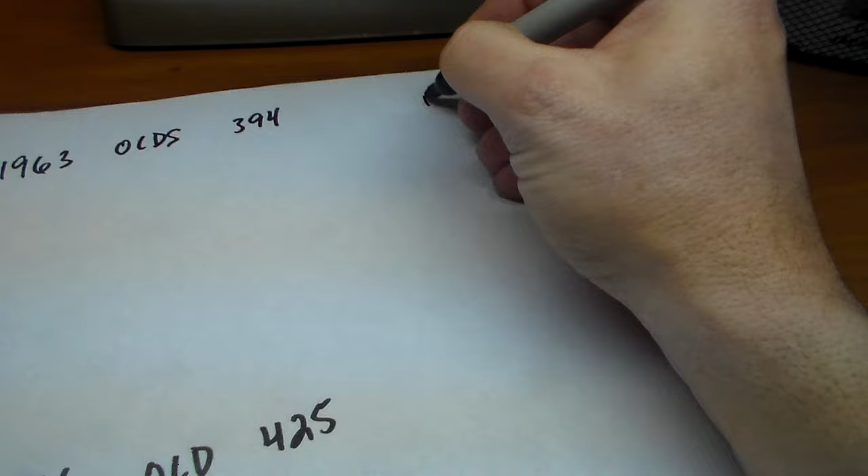And then down below we're going to do the second one: a 1966 Olds 425. And we'll say both of these are in a B body—that's what that car is. A C body is like a 98, like an Olds 98. That one's an 88, an Olds 88.

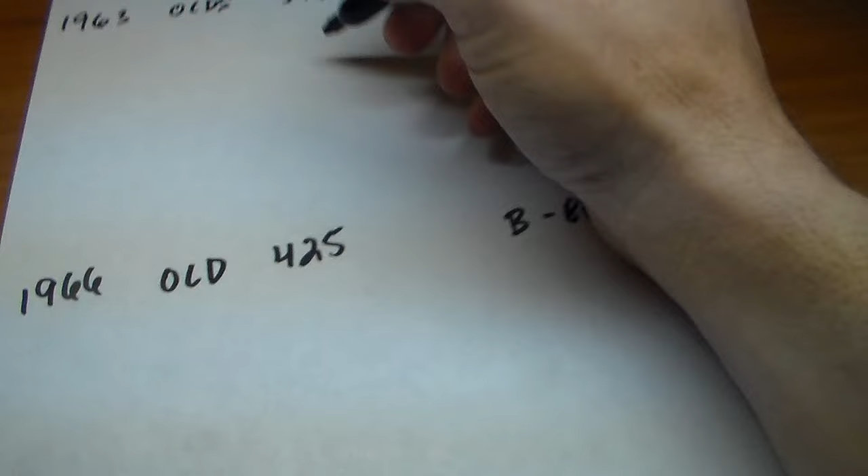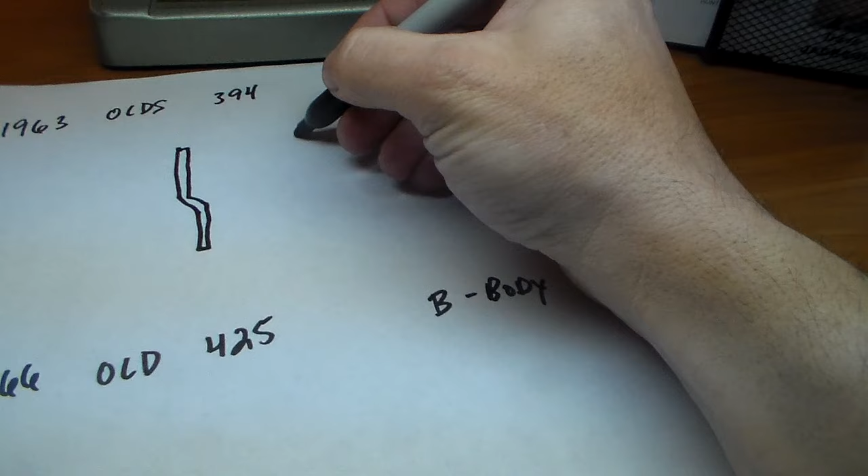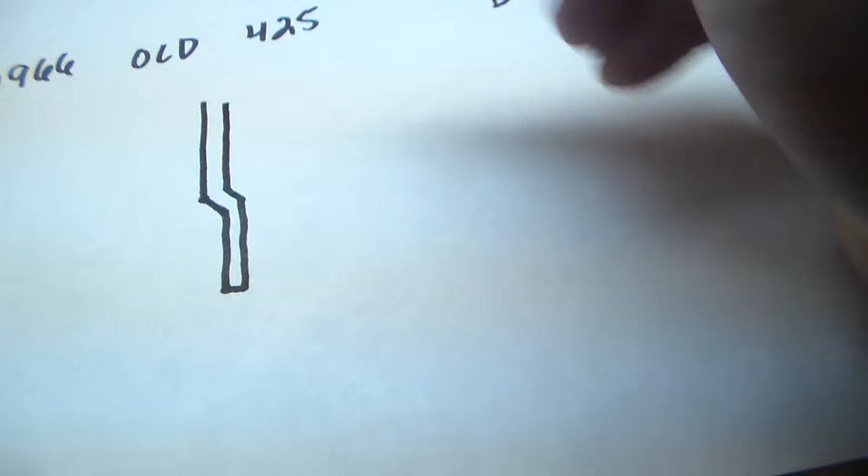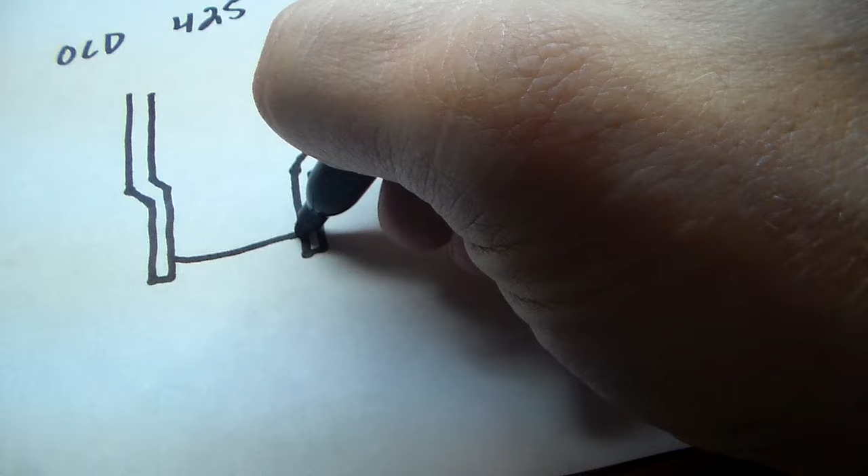So we're going to have an engine. Well, let's just for simplicity's sake have two frame rails going in here—yes, I know they're not the same size. Two frame rails here, and this jogging-over deal, this is where it jogs over, kind of by the wheels. And then we're going to have a cross member right here, cross member here, same place.

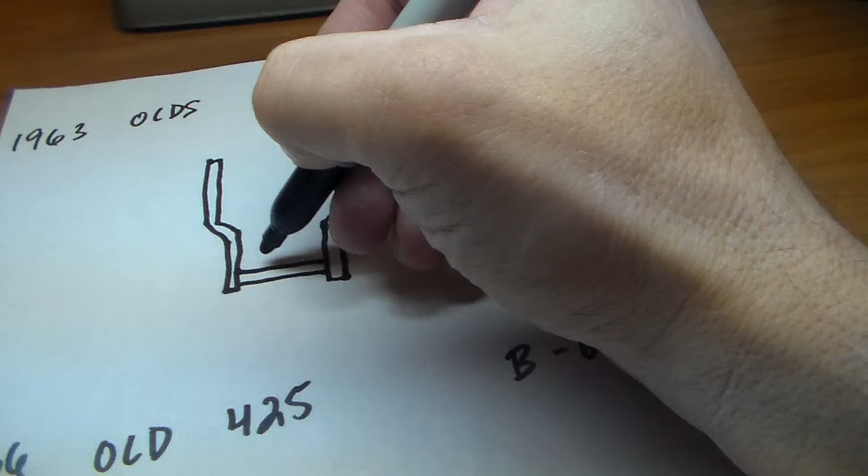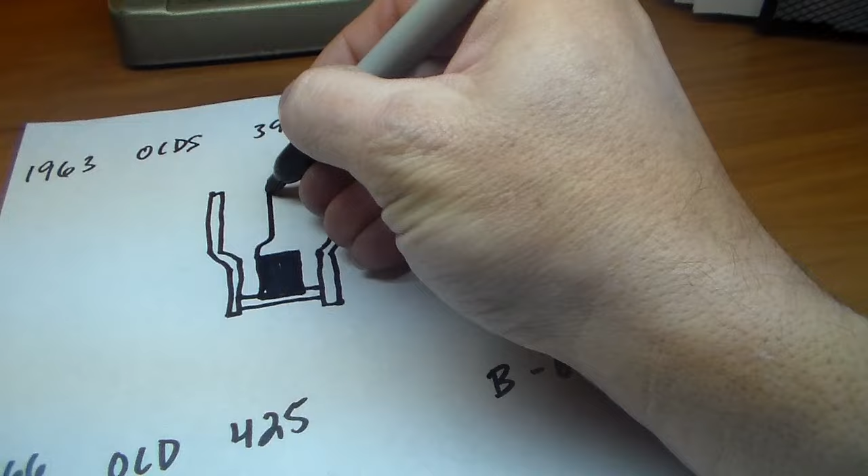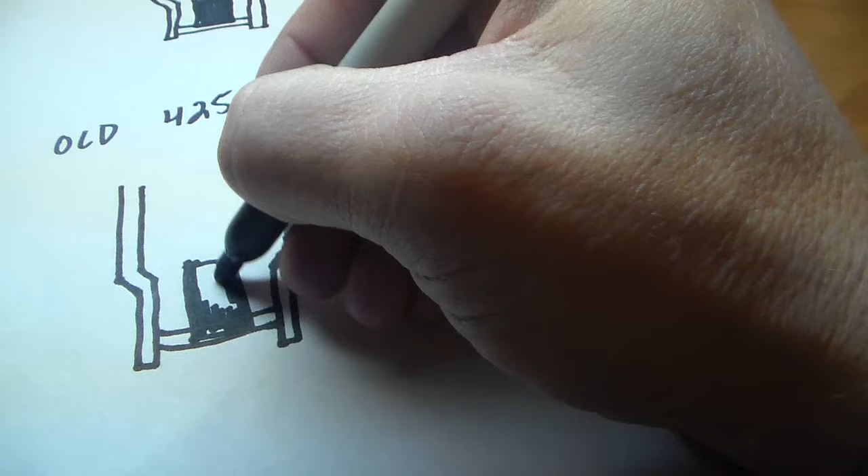And then we're going to have—now this is not going to be to scale necessarily—but we're going to have an engine right about here, transmission, drive shaft, that's the rear. And up here you're going to have another engine block, another transmission—it doesn't much look like a transmission—and the drive shaft. Okay.

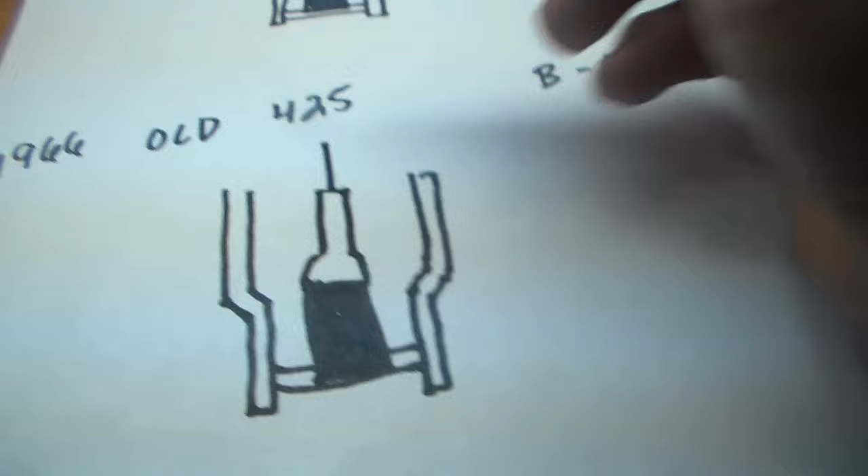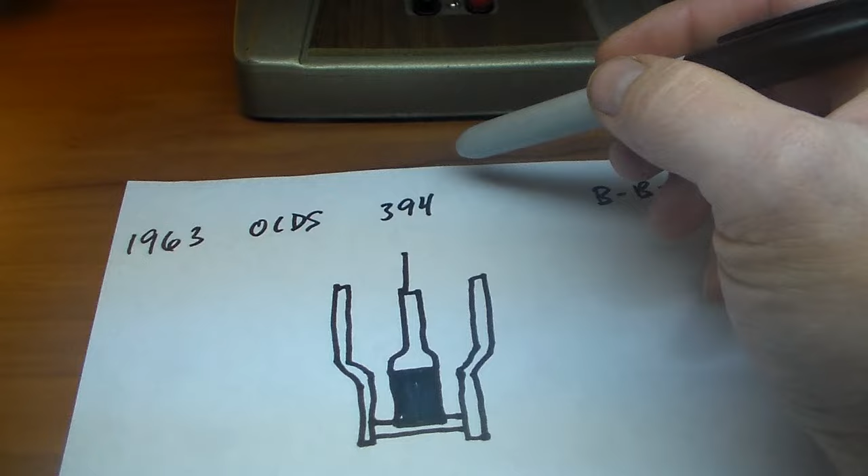So, first thing to understand is 1963 Olds with a 394 in it. A 394 is the old early engine—that's the old, like a 303, 324, 371, and it ended up with a 394. So that's the old style Olds engine, and then a 425 is a big block, but it's a new architecture.

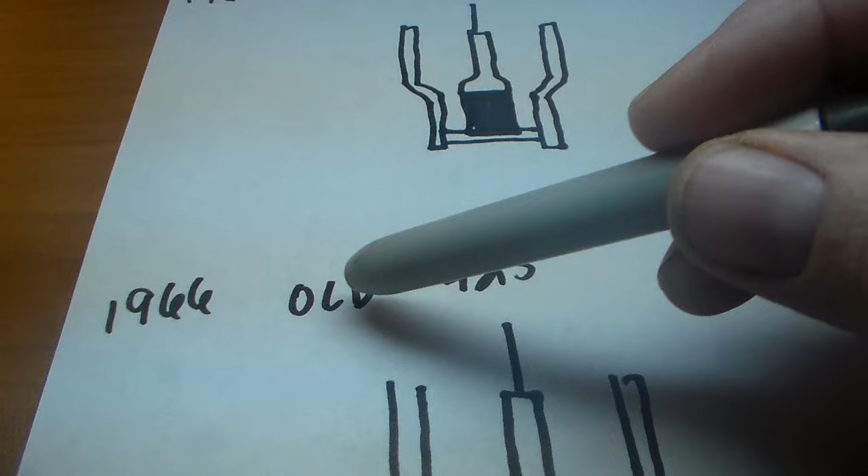They first came out in 1964 with a 330, which is a small block, but as far as anything considered late Olds, like 260, 307, 330, 350, 403, and then you have the large engine, which is 400, 425, and 455.

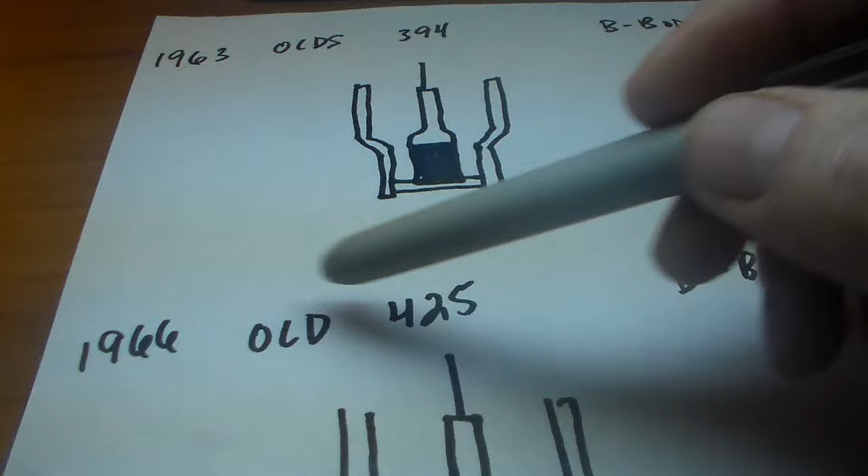Aside from how wide they are up top because of the different size of that part of the block, the mounts are the same. The architecture of the block is the same. A few things actually swap over between a big block and a small block, and we've kind of covered that on another video.

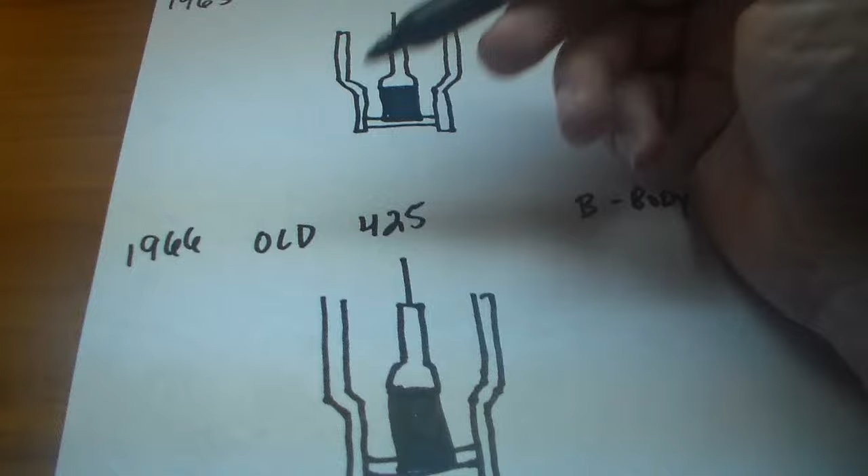But what you need to understand, where the hang-up comes in on this, why you can't just take a later model 425, 455, 350, 403, whatever Oldsmobile engine after '64, is because of the mounting. Alright, on this early engine, this 394, this is the front right here.

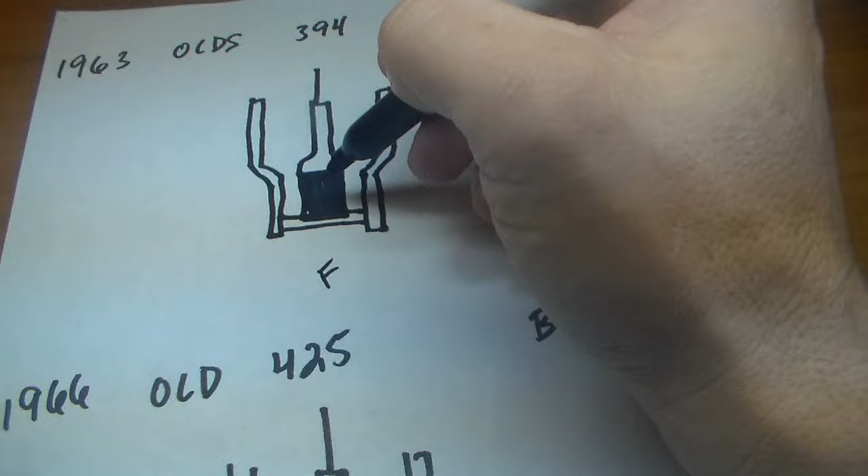Okay, let's do this one first. Let's do front, because everybody's more familiar with this, and I think it'll be a better effect if I do this one first. Now, this is the later model, so this is a 425, but it could be any engine, basically any later model 350, it could be a Pontiac engine, a later model 350 Pontiac.

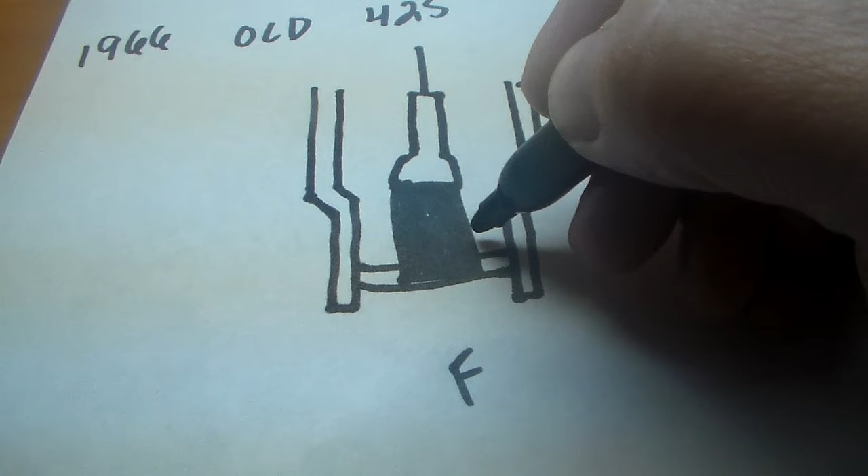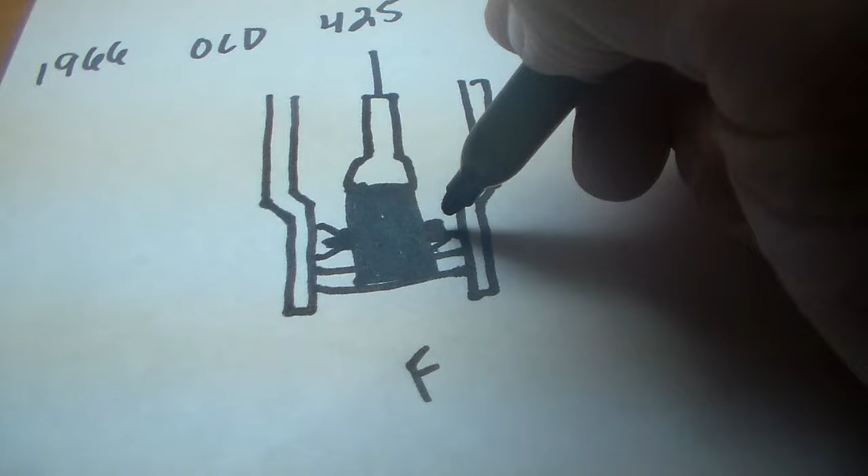So anything we're mostly familiar with, they're mounted on a 3-point engine mount system, right about here, and this includes other divisions and models, Ford, Mercury, a lot of them have an engine mount here that mounts into the left side of the engine, right about midway of the block, one in the same place on the passenger side, mounts in right here. You've got a mounting pad somewhere under here for that, and then back here at the back of the transmission you have a cross member, and you have a mounting pad right back here at the rear, or it may be kind of under it, but that's your 3-point mounting system.

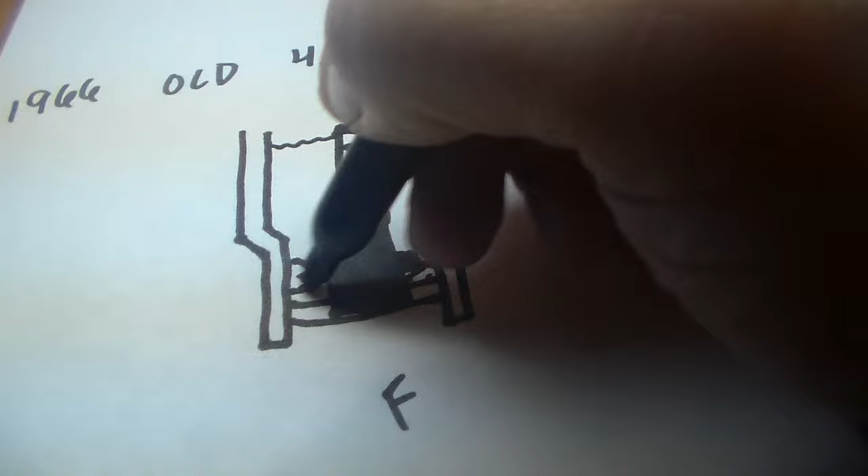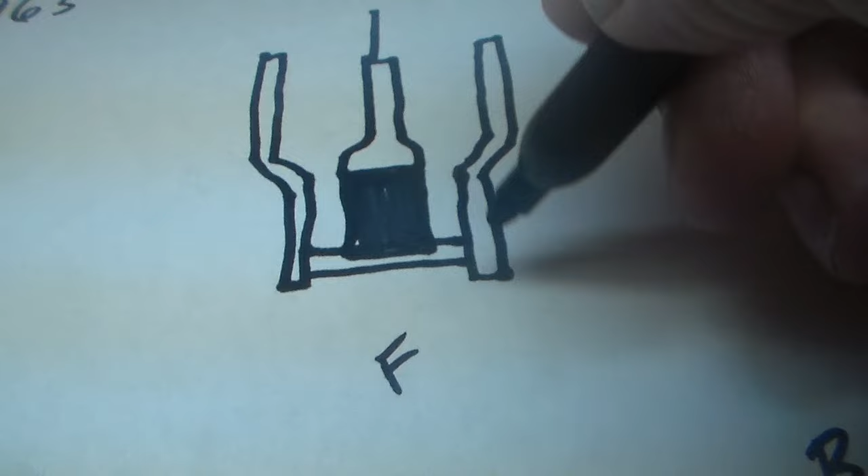It's like an inverted T. So where the difference comes in, where the mounting architecture is different on the 394, the 371, the 324, and the 303, is up front you don't have mounts on the side right here. You have one single mount that's under the front, under the harmonic balancer, that mounts right here, and then your other two mounts are back here almost in line with the crankshaft flange.

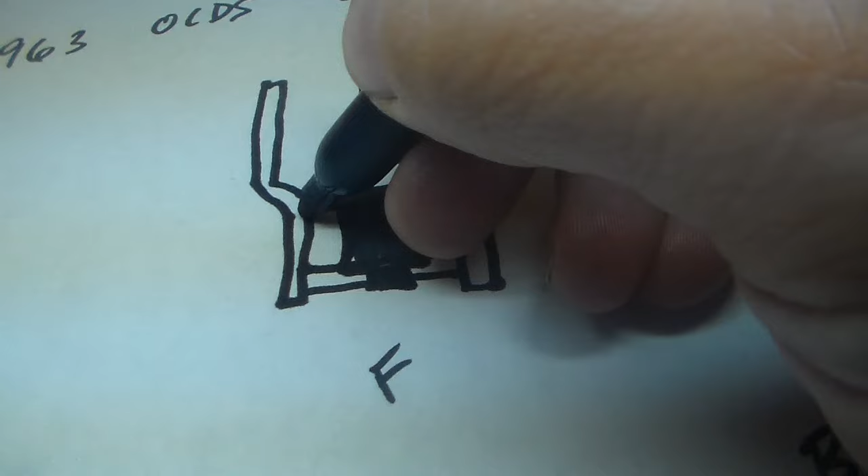You have an extension coming out right here, and you've got like a little frame reinforcement, and that's where it mounts. And on these, actually, the block is part of the torque converter housing, so your transmission is more along the lines of just this part from right here back. If you ever look at one, you'll understand. But that's your T, it's no longer inverted.

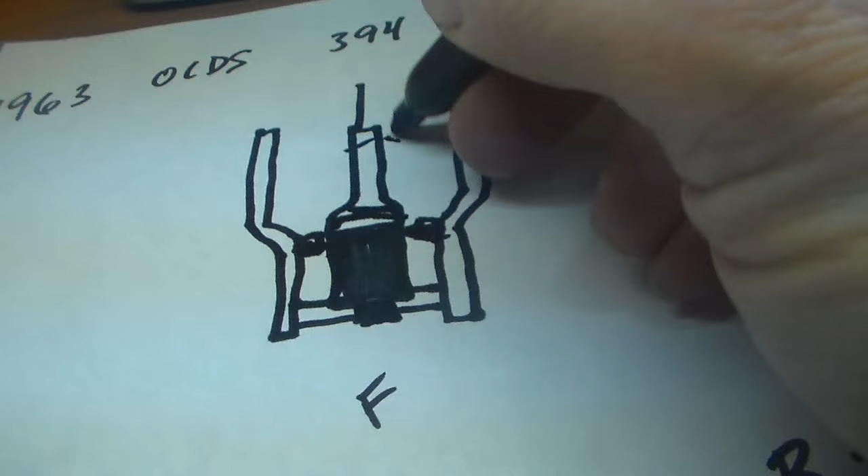You got two side mounts here and one front mount. There is no mount back here. Now, I think the drive shaft on this one may not have a center mount in it, but now I say there's no mount back here. There could be. As long as I've owned that Oldsmobile, that '63, I've never been far enough under that car to actually verify that. Now, it may actually have 4 mounts, but I know for a fact it's got these 2.

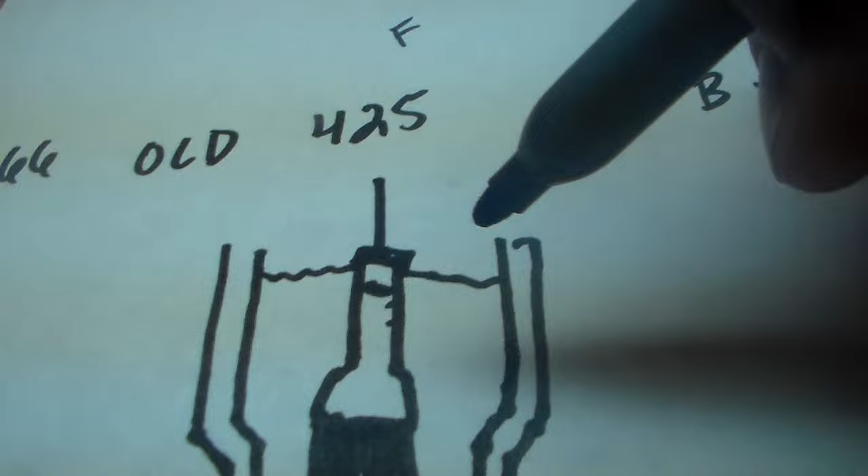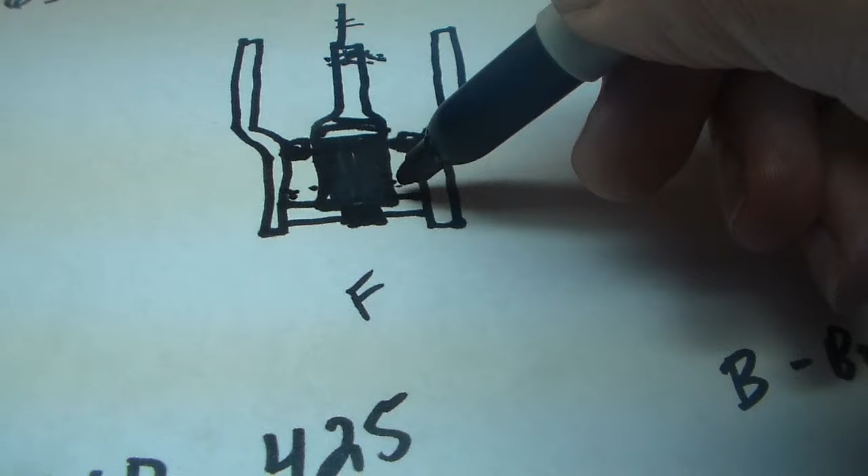So where this comes in at is, on the early car which I have, you do not have provisions to mount the later model engine here on the midway through the block. Now, if you did, or you construct mounts, which you certainly can do, then you can ignore this front mount. But then again, you have to come up with a way to mount the newer engine and transmission back here someplace, so you're going to have to add in a cross member where there is none right now, as far as I know.

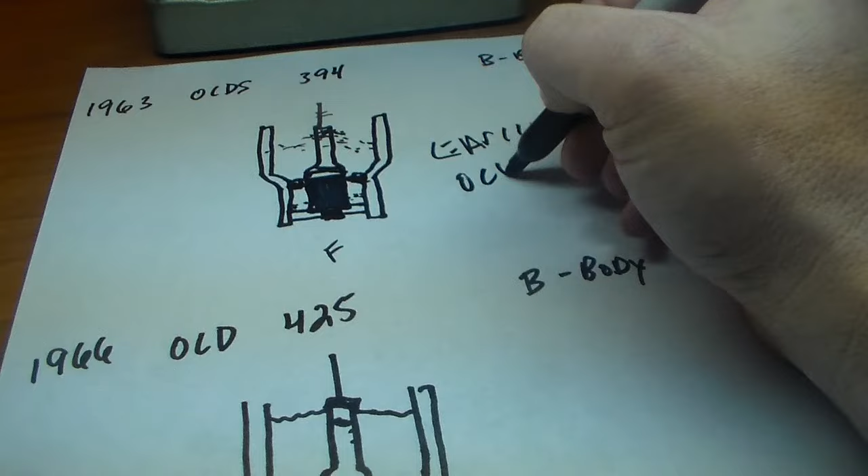So it's not, there is no drop-in engine for it. The only thing that drops right back into it is another 394, 371, another early Olds. So that's the only thing that drops in. Otherwise, you have to pull the engine. That's why I'm saying I may have to pull the engine and transmission totally out and just store it.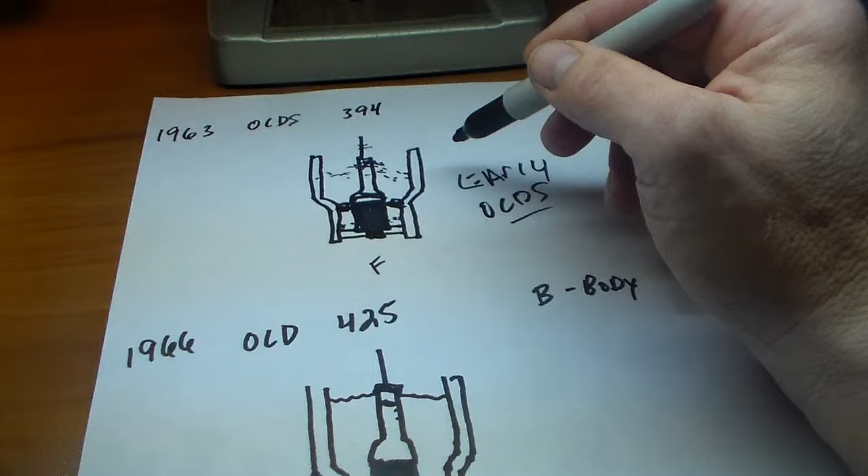And just ignore it. Now, I said I want to try to get that engine running, and I'm not going to give up on it if it can be done easily. But, as I said, they're expensive. They're expensive to overhaul, and there's only a limited amount of aftermarket parts for them.

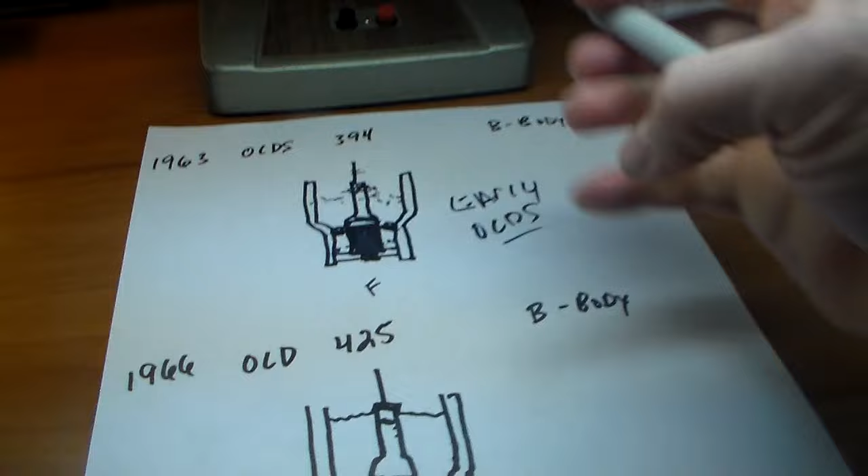Well, there's enough to rebuild them, and that transmission behind it is called a Hydra-Matic. I know some of you have heard of a Hydra-Matic transmission. Let me explain a little bit about it.

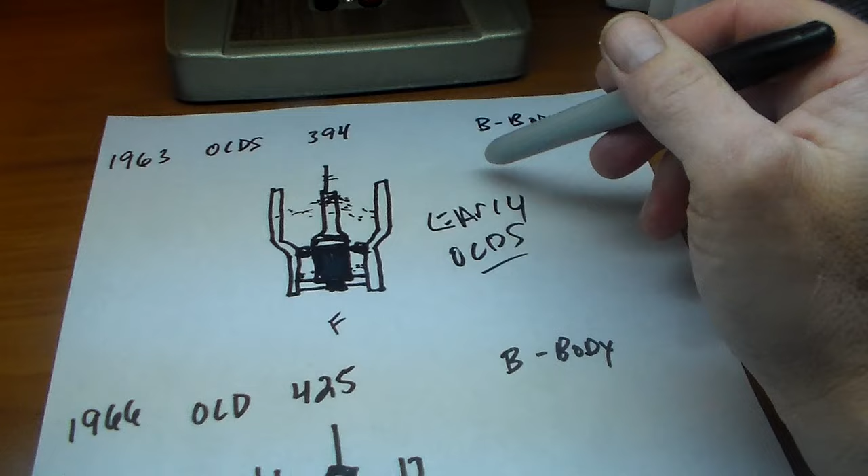Hydra-Matic started out as a division. The first division that made automatic transmissions for General Motors was called the Hydra-Matic division of General Motors, and that's what they did, they built transmissions, from about 1938 or 1939 or 1940, somewhere in there.

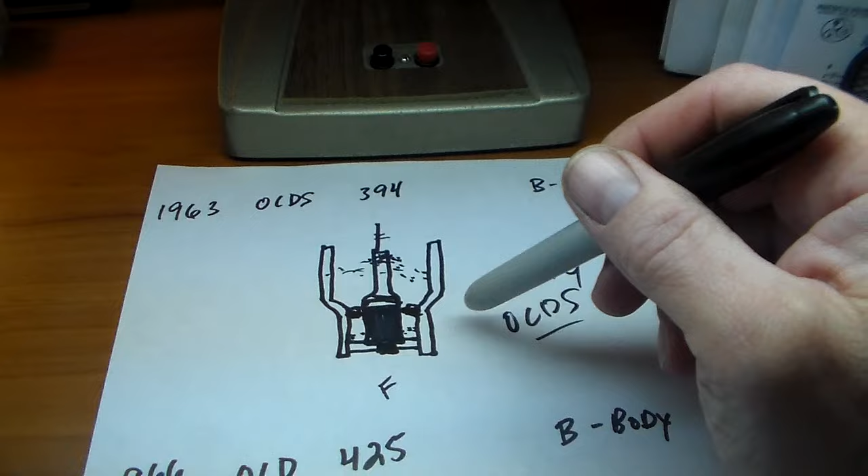They came out with the first self-shifting automatic General Motors transmission, simply called a Hydra-Matic transmission. It was a 4-speed automatic, but it was not overdrive. So if you hear 4-speed, don't think it had overdrive. It didn't. The highest ratio was just 1-to-1, but it had a couple of short gears, then a longer third gear and even longer fourth gear, but still 1-to-1.

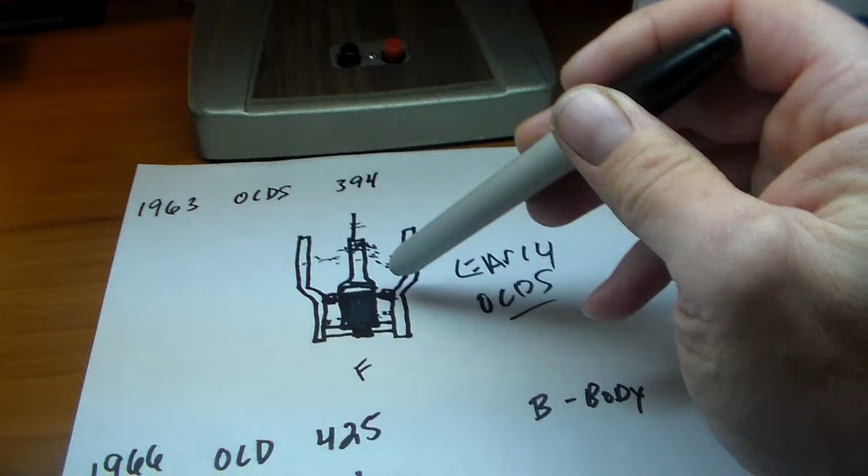That transmission was a 4-speed, what was called a fluid coupling transmission, meaning it did not have a torque converter. I think that early 4-speed version had two pumps, a front pump and a rear pump. Those cars you could actually push start, because if you pushed it, it turned the rear pump and that would actually turn the engine.

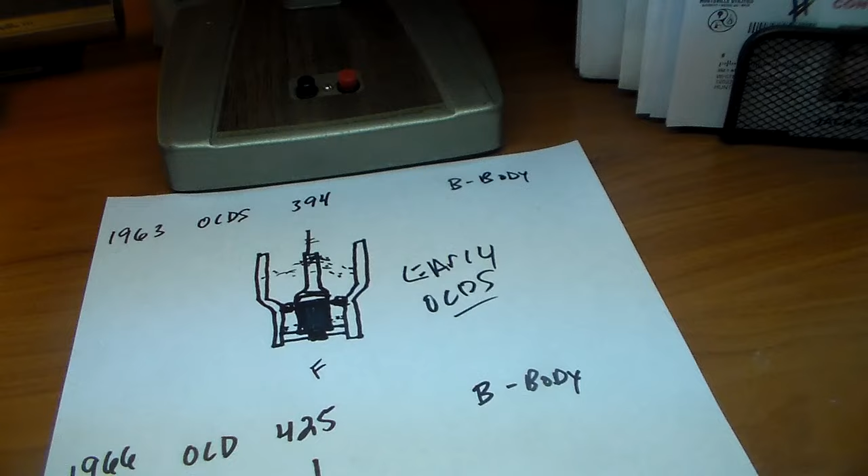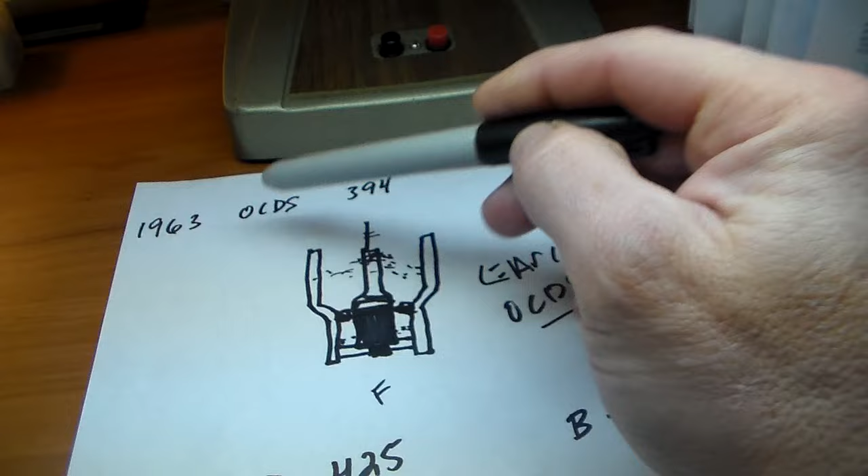Just like some of the early Torqueflite transmissions in Mopars. That transmission was used up through the mid 1960s. I think one of the last cars that used it was possibly a 1963 Cadillac, maybe a Pontiac also. But around 1961, Oldsmobiles started using a simplified 3-speed version of that transmission.

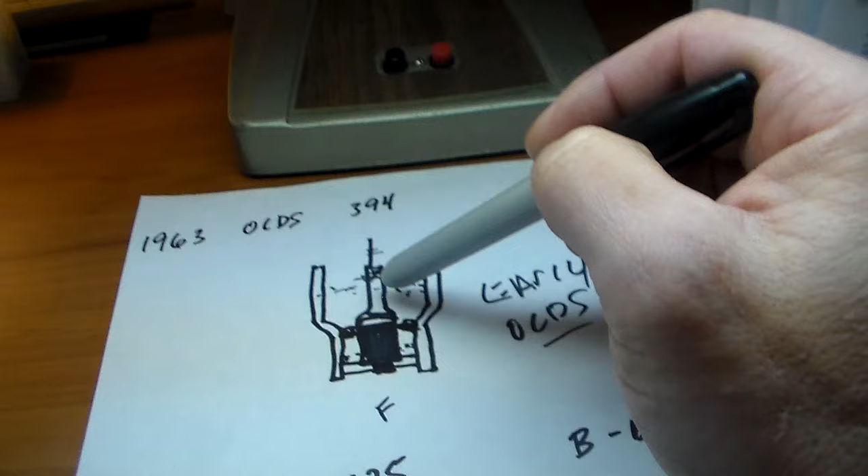It was no longer a 4-speed, it was a 3-speed version. They called it a Slim Jim, but its official name was, get this, I know you're going to laugh, it's called a Roto Hydra-Matic, R-O-T-O. Now why they called it a Roto Hydra-Matic, I don't know, but they did.

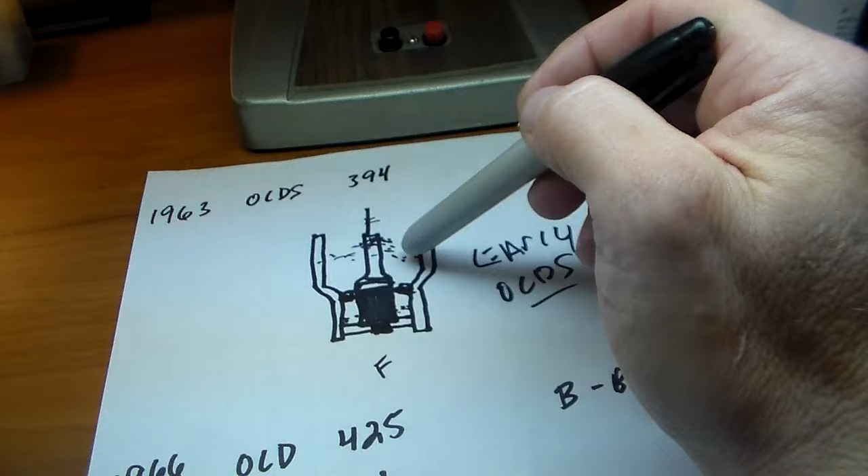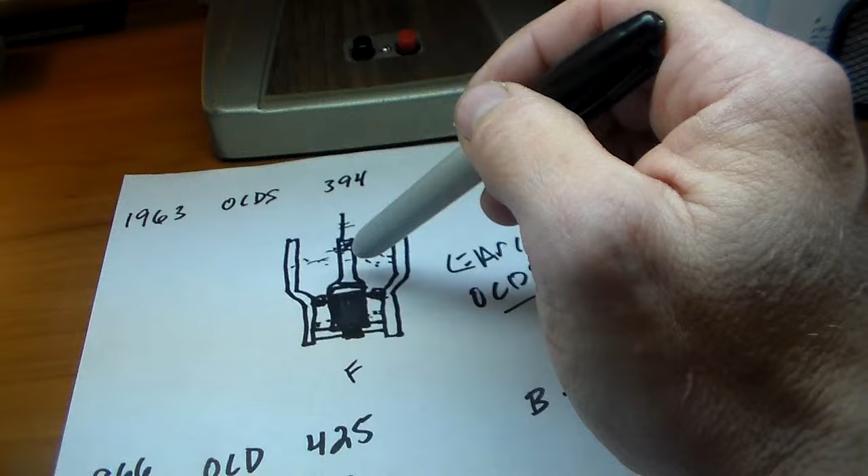For all intents and purposes, it worked more or less the same way as the old Hydra-Matic did, but it didn't have a rear pump, and it was only a 3-speed. Those things shift weird, and I really want to use that one out there because I want to experience that firsthand, I want to see how that thing works. They say they don't shift very well.

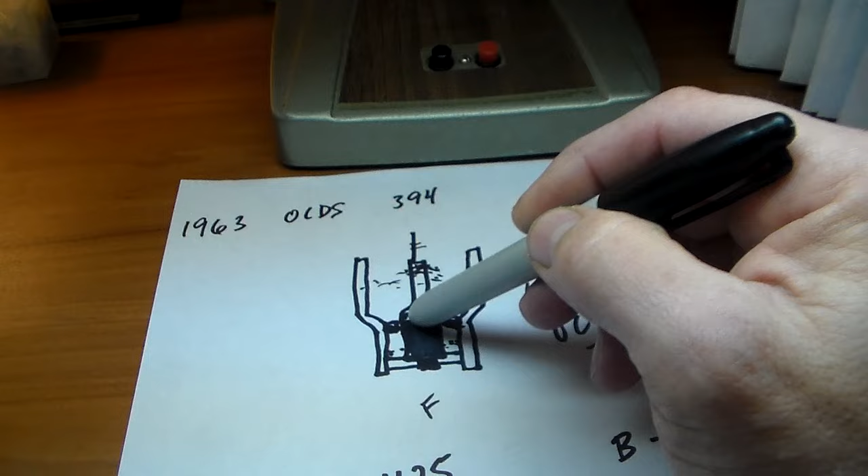That presents a problem, because that is also a fluid coupling transmission, which means it has a device that sort of functions like a torque converter, but it's not. It does not multiply torque. It just basically means one part rotates and the other part is driven to rotate by fluid in there. So there's no torque converter per se.

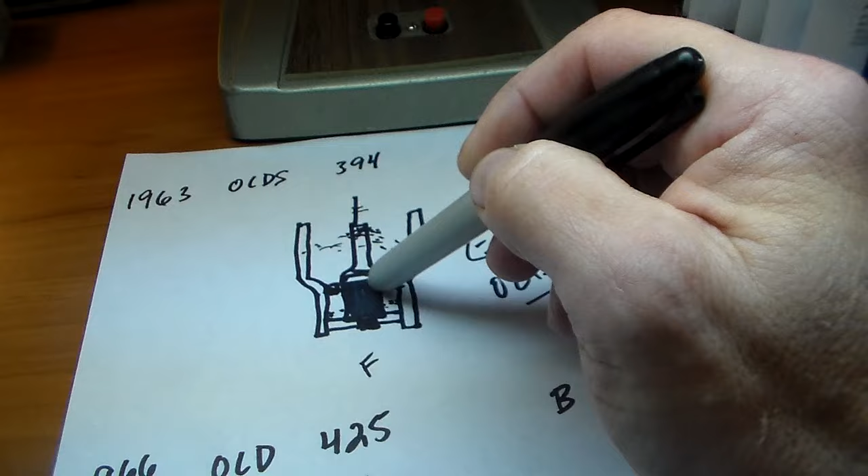Now where that becomes a problem is that on that old car out there, the engine is seized up tighter than Dick's hatband. It will not turn. So that's the problem, because that coupling is inside where the torque converter goes.

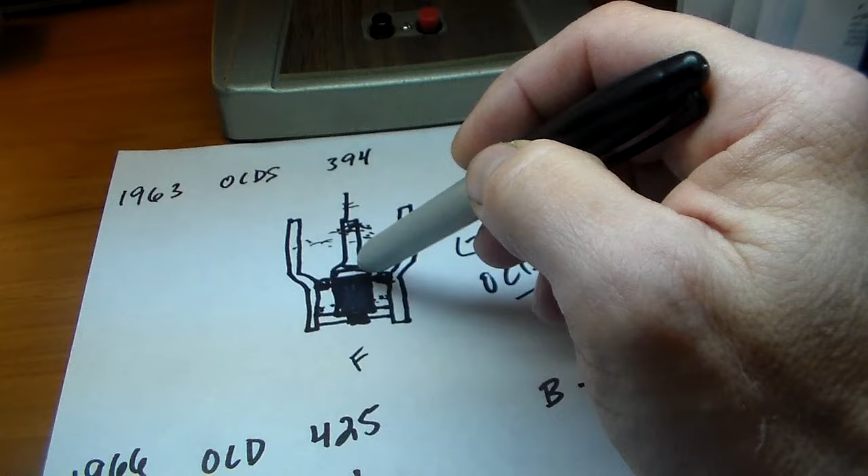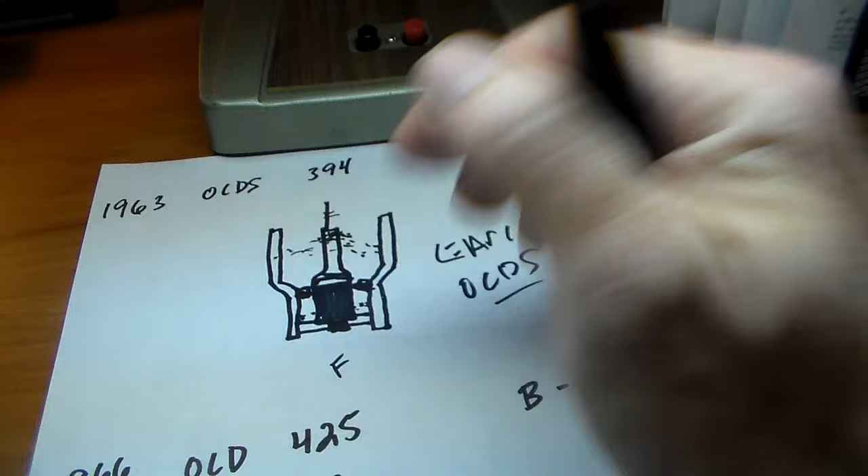You can access it from the outside, but the problem is that if the engine won't turn, you can't access all the bolts to separate the engine and the transmission. I've not seen one of those couplings, but take my word for it, it's a basic coupling in there with bolts running through it. So if you can't rotate the crankshaft to get to all the bolts, how are you going to get the thing unbolted?

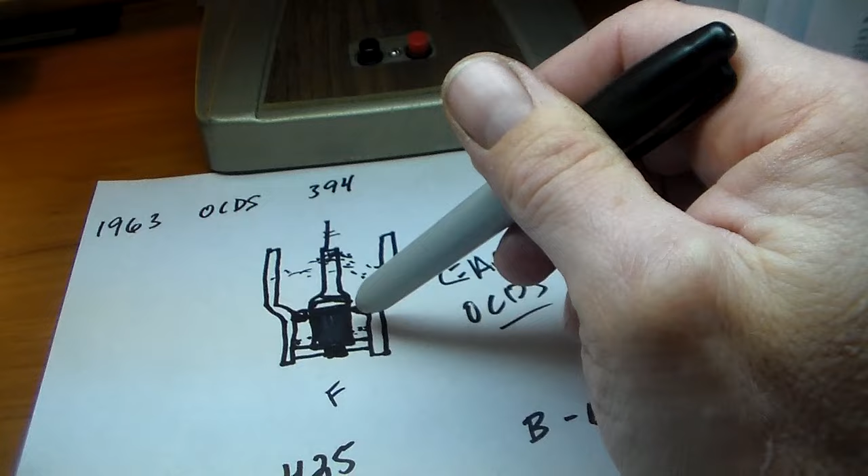So we're up against two obstacles here as far as that engine and transmission goes. That's why, at least during the winter, I haven't been too fired up to do anything with that.

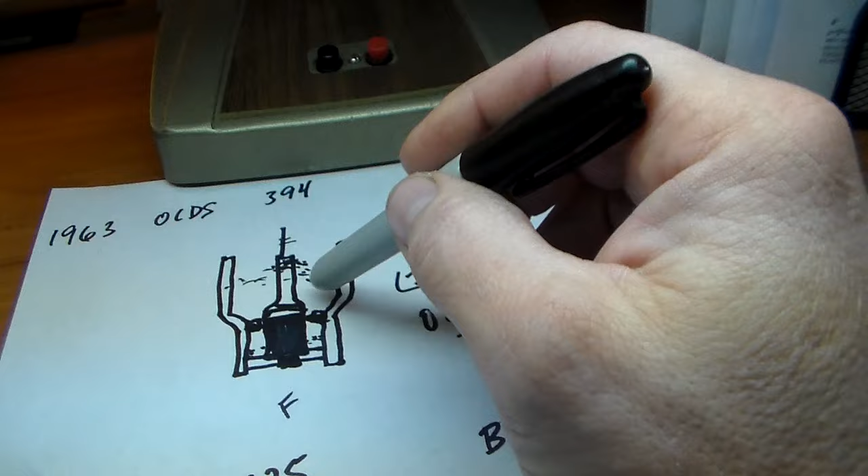You're potentially running into a lot of money if one of those goes bad. We know the engine's possibly junk, but if the transmission no longer works, I know already I can rebuild a transmission, but that one I don't know, because these days, to get one of those Hydra-Matics rebuilt, you have to find the old master who knows how to do it, or somebody trained under the old master who knows how to rebuild one. There aren't that many people who can do them anymore.

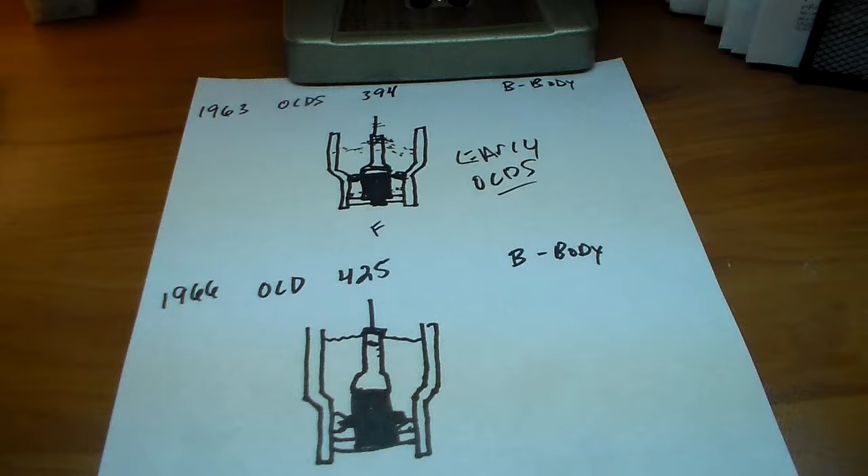So anyway, that's the story, and that's why you'll hear references in my videos where I say well, I'm still thinking about it, I hadn't decided yet. Well, that's the truth. I haven't decided yet.

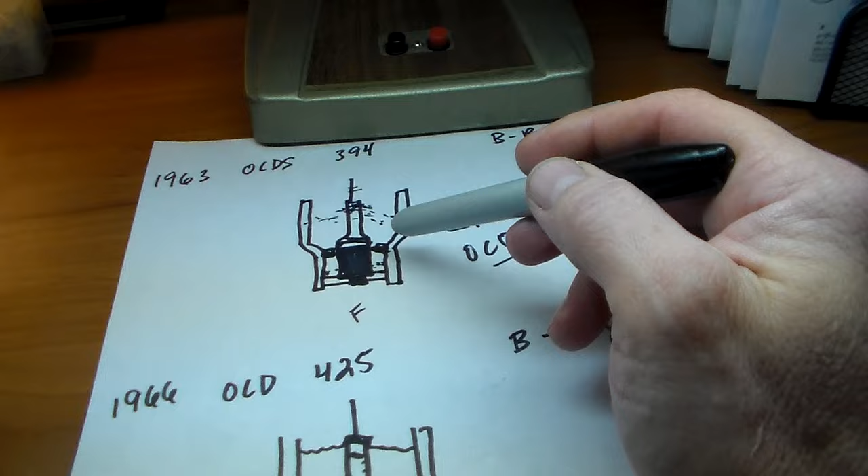Bottom line is, I don't want that car to sit out there like it has been. It's been sitting too long. But I'm afraid I'm just going down a dead-end road trying to find another running engine, because there aren't many running engines anymore that anybody wants to sell. If they sell one, it's because it's already blown up, or it's going to be blown up, or they're selling a rebuilt engine that's about $6,000 or $7,000.

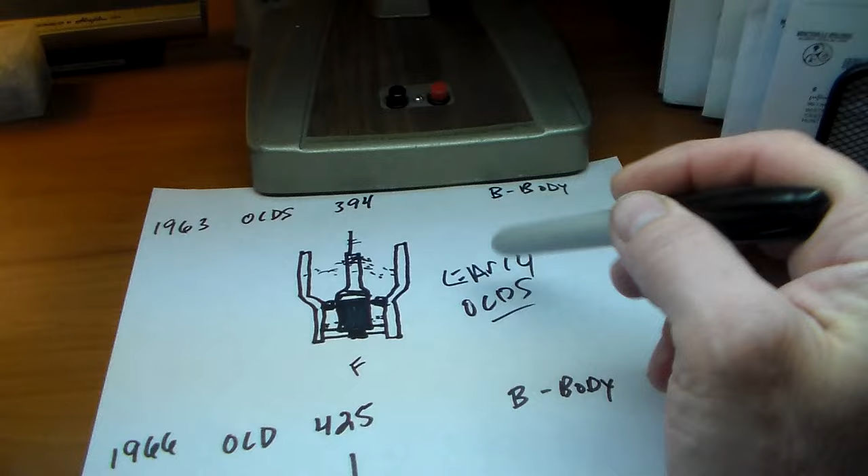So what I'm thinking is, you guys have asked this in different videos, but what I'm considering is the route I'm going to take is I think I'm just going to go ahead and pull the old drivetrain out of it, and we'll spend some time looking at that old engine, because I know I've gotten into this and I don't want to let you guys down. I know y'all are looking forward to that, so we'll see what we can do with that old 394. I'd like to use it, but...

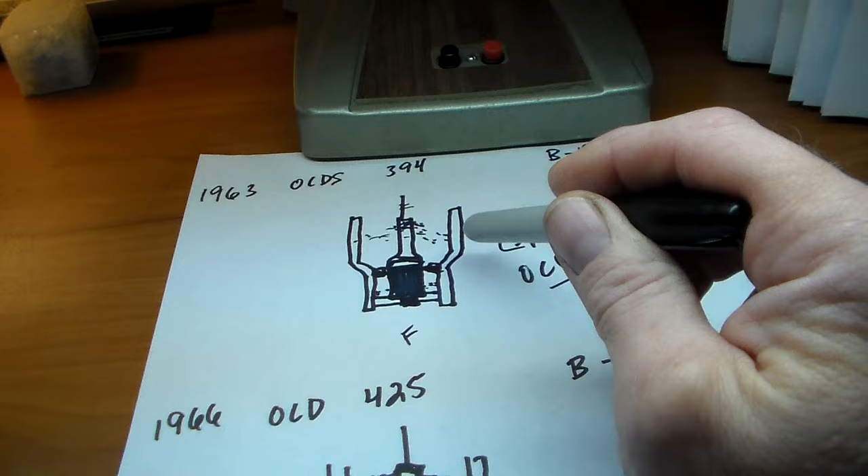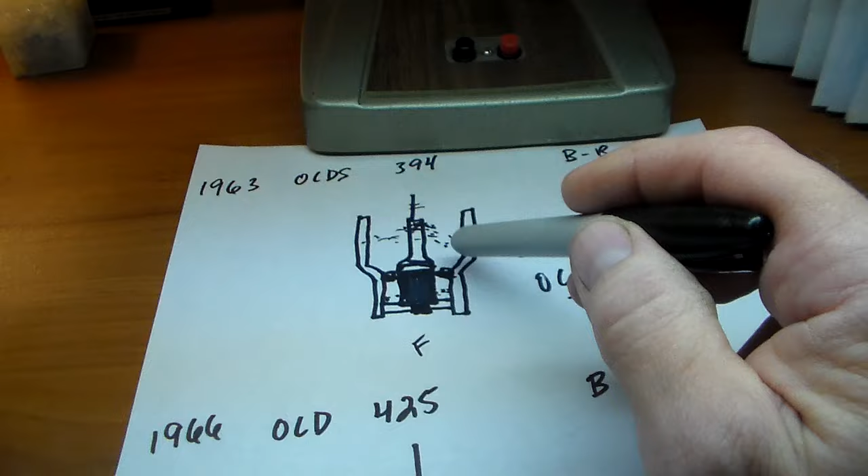Ultimately, if it comes down to me trying to find the money and the time and the ability to rebuild all that and put it back in, or putting another engine in that car so we can just drive it and finally use it, then I'm going to put another engine in it. That's all I'm going to do, because, you know, I'm probably considering - you can still find Oldsmobile, Buick, Pontiac, and Cadillac engines pretty cheap.

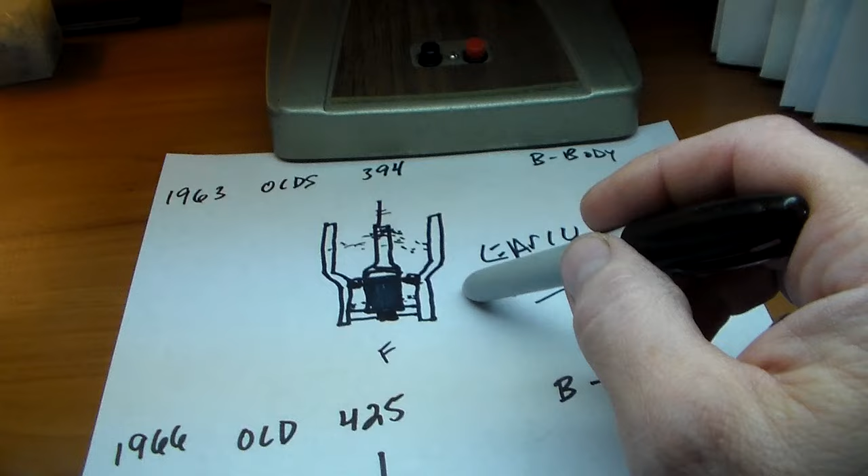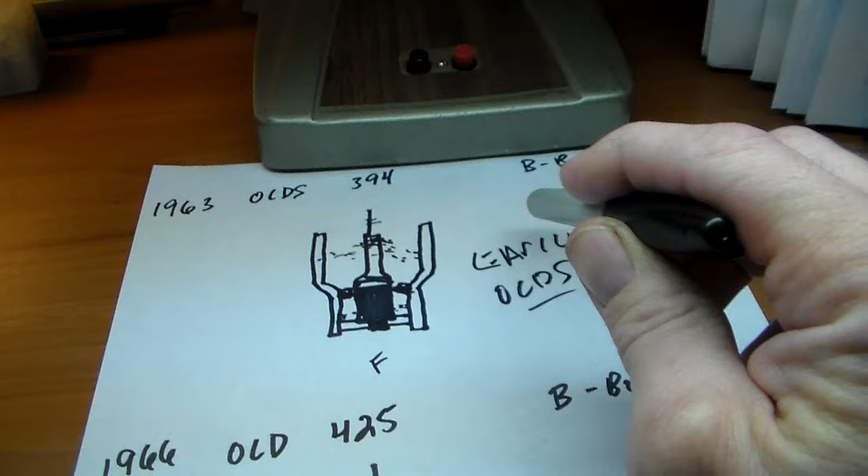These stupid garage shows have kind of ruined people on this stuff. They think everything they've got now is worth much more than it is. But really, the way to buy something like this is you find an Olds 98 or 88 or a Pontiac sedan that nobody wants for any other reason except a running engine and transmission, and you buy the thing cheap once you verify it's a good engine. So, you know, it's yeah-but, and I hate to keep saying that, because it's mostly my own fault and nobody else's.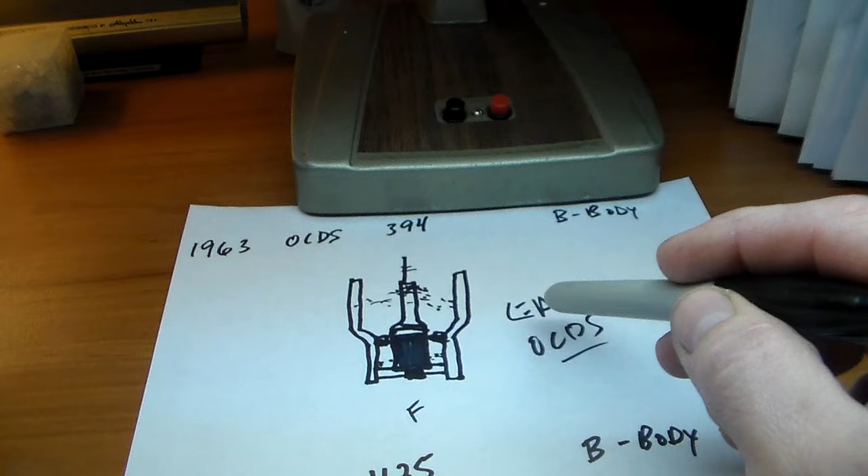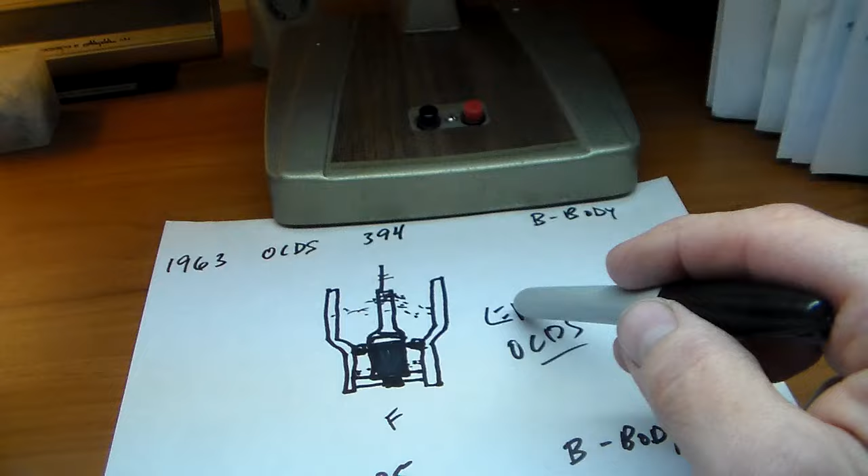That comes into a logistical thing about where I live here - I have to play my cards right to be able to bring in an old car like that and get it in where it's not going to infuriate one of these goody neighbors here with me tearing an engine out of a car, because that's just the way they are here. I've said this, and I know nobody to blame but me. I am where I am, and that's it for right now.

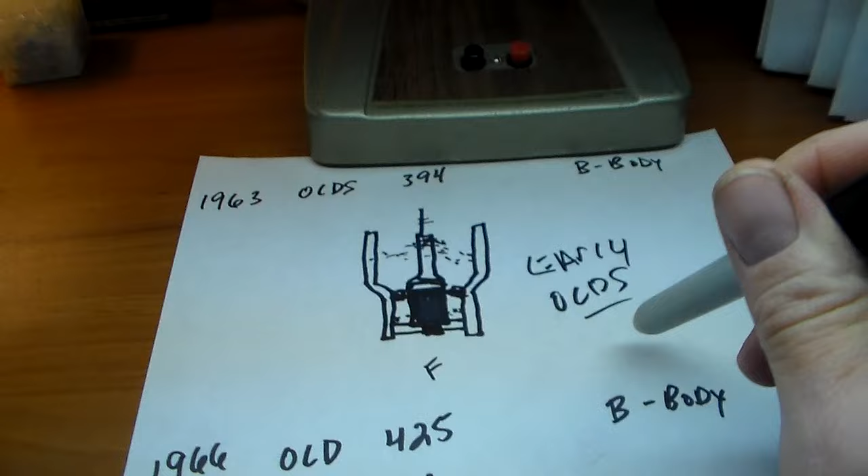So we'll see what's going to happen on this, but I've not forgot about it, and I hope this kind of explains a little bit more about the things to do with that car. If any of you have any ideas, or you have a lead on an engine or a car, feel free to share it. But I don't hold much hope for another one of these, because like I said, there are just not many out there anymore.

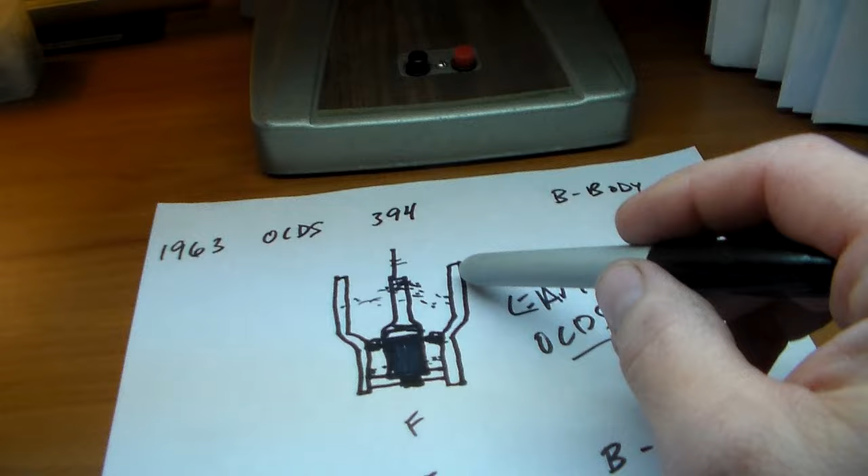Those cars were not desirable, except for like a Starfire convertible. All the rest of them rusted out and got junked a long time ago. So, but let me know if you know about anything.